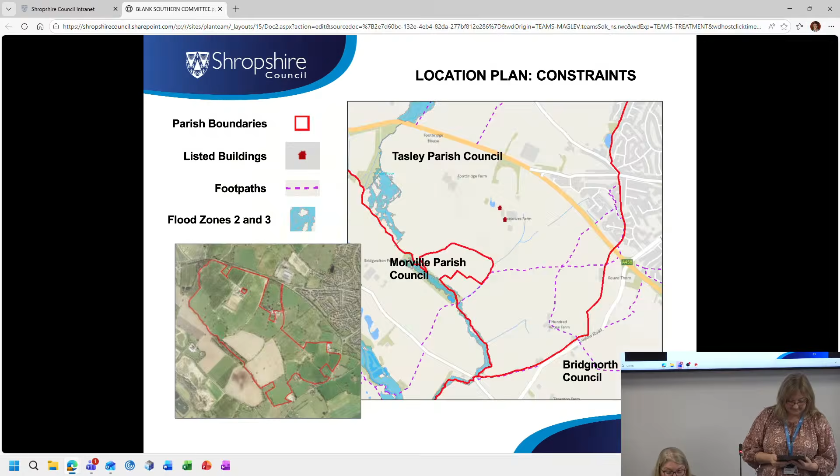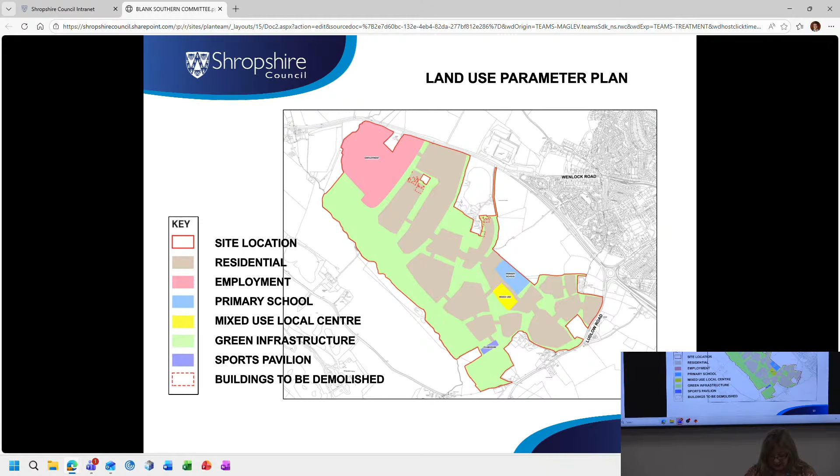The land use parameters plan is your next paper copy. This sets the zones or areas for different uses. The zones include, as appropriate, roads, incidental open space and associated infrastructure. The sports pavilion includes associated car parking. The mixed-use local centre incorporates commercial, retail and residential, including specialist housing. And the green infrastructure covers public open space, amenity space, equipped play areas, sports pitches, water bodies, drainage utilities and service infrastructure, footpaths and cycleways.

Again, you have a paper copy of this access and movement parameters plan to enable you to read the key. This plan lays the proposed accesses and movement routes over the parameters. Essentially, the main spine road is shown in yellow and is the intended bus route. Blue star shows the proposed bus link point

between the employment land and the spine road. This is intended as one way, with the bus entering the site through the Z01 access and leaving through the Z03 access. So the blue star is up here. The proposed bus route is through the employment site, onto the spine road and throughout onto the B road.

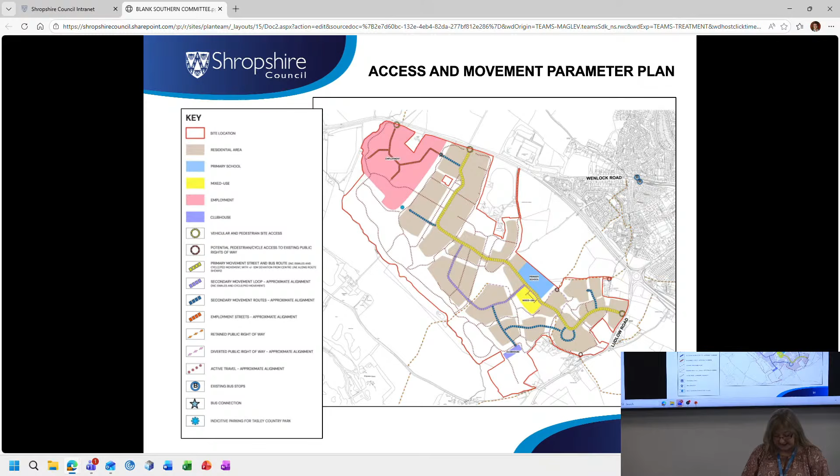Pavement links are proposed between the Z01 access, Z02 roundabout and approved Tasley Gateway roundabout, and from the Z03 access up to the Ludlow Road roundabout. The dotted lines indicate the intended active travel routes. Your key for this one is on your next paper copy.

This parameter plan shows the extent of public open space proposed together with the retained trees and hedgerows marked. These are the elements on which the layout on the illustrative master plan has been formed. You can also see from the satellite image on the right how the pattern and form of the land has been largely retained.

Additionally, when viewed together with the constraints plan on the left, the country park is proposed to be located where the land clips into flood zones 2 and 3, creating opportunities for providing and enhancing blue infrastructure. So you can see the curve of the country park and the curve of the flood zone.

There are 6 locations identified for equipped play areas, and these are shown as the purple and yellow stars. Yellow star, purple star, 6 altogether.

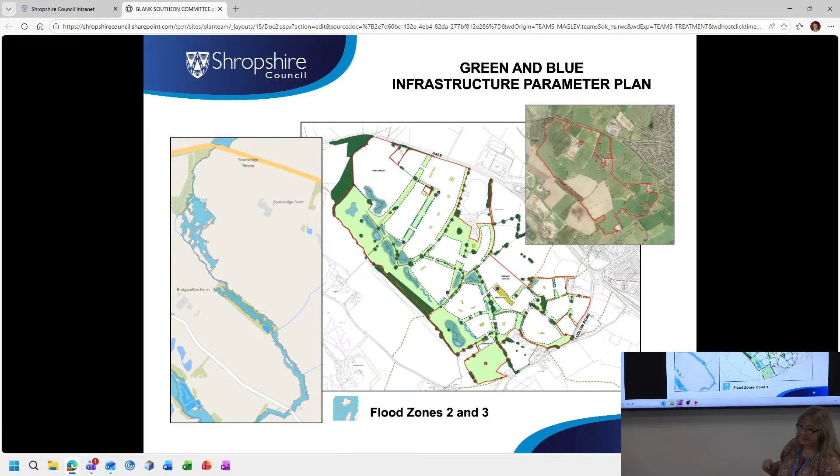The complexities of this play strategy drawing are better viewed on your paper copy. The plan shows the indicative locations for equipped play areas. These are positioned at the recommended offset distances and walking distances from dwellings. The strategy also indicates additional opportunities for indicative play on the way in yellow and outdoor gym features in light blue. So your strip of outdoor gym features is there.

And the indicative play on the way are the yellow points here, the smaller yellow points. Fitness routes are annotated by the dark blue lines.

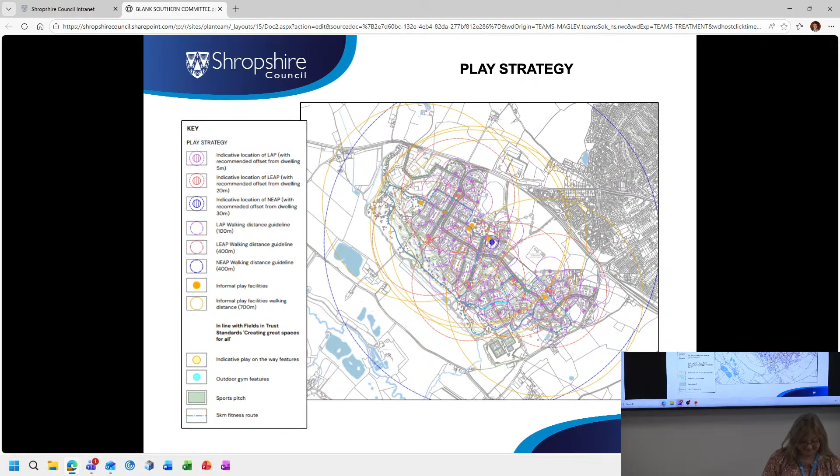The green and blue infrastructure features and play areas are brought together in this illustrative plan to provide an overview of the landscape strategy. I've not added the key on the image as it's extensive. However, the numbered elements provide an indication of some of the features that are proposed to be included. For example, the community growing area at number 7 and the cycle skills track at number 2.

I'll now go on to the 3 access points, which, as a reminder, are there, there, and here.

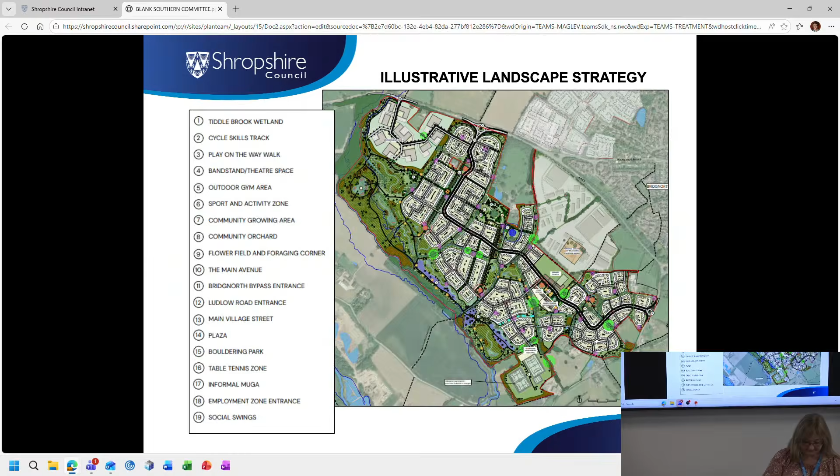This slide shows the proposed employment access, which is a priority T junction with a ghost island right turn lane on the A458. It will be used exclusively for the employment zone and is designed to accommodate HGVs.

The dedicated footway and cycleway on the southern side of the carriageway would extend up to the A458 residential access to the west. The inset in the top right shows the location of this junction in red, together with the locations of the other proposed junctions, and the position of the roundabout previously approved as part of the Tasley Gateway development, drawn in pink.

Gateway roundabout. This plan shows the footpath and cycleway here, which extends back down to the residential access.

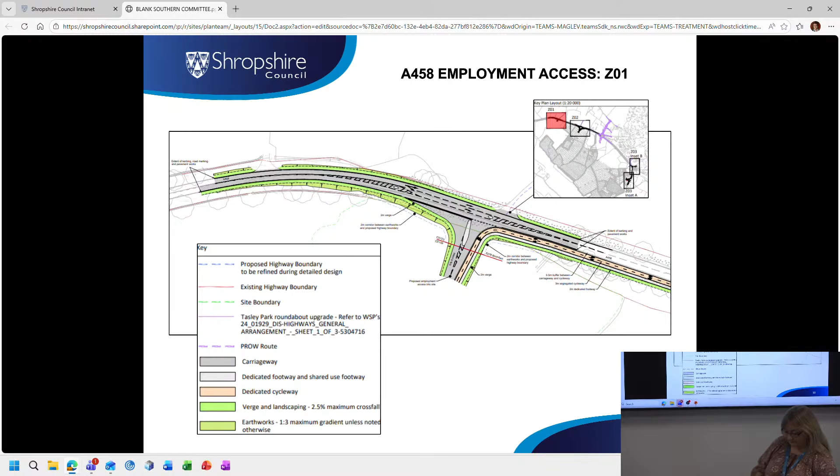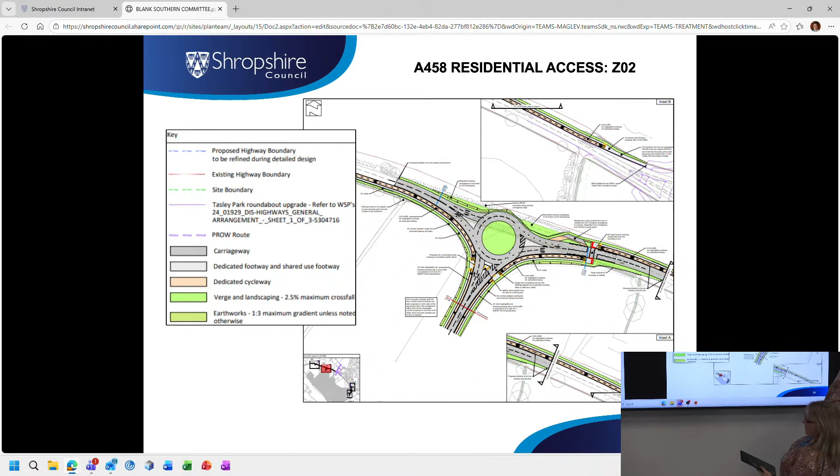The image on the right shows the 3-arm priority controlled compact roundabout, which is proposed as a residential access off the B4364. There is a pedestrian crossing with tactile paving on the western arm of the roundabout.

That's into the development. And a footway and cycleway extending up to the Ludlow Road roundabout, where it would link with the existing public right-of-way, here. This is indicated in the image on the left.

Here there is a second toucan crossing proposed together with the formalisation of existing crossings to facilitate walking and cycling into Bridgnorth Town Centre. The photograph of Ludlow Road is included to indicate the existing refuge island there would be widened.

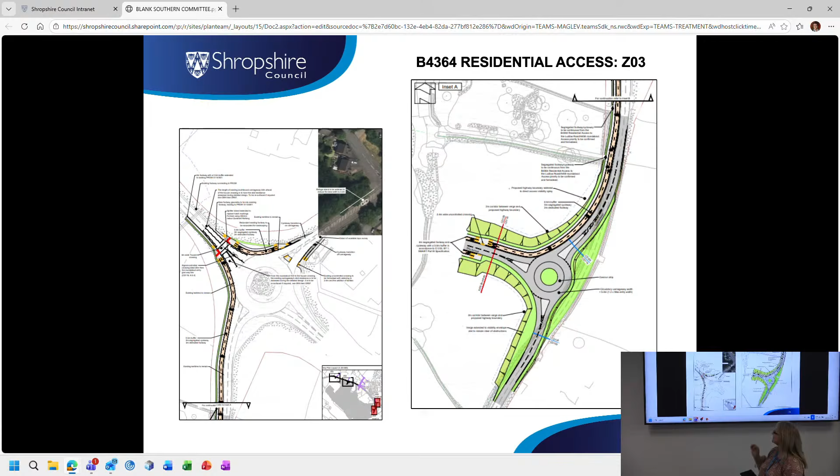The accesses are proposed in conjunction with a reduction in speed limit to 40 miles an hour along both the A458 and B4364, shown in green on this plan.

This will be complemented by associated signing and road markings, with a detailed signage strategy to be agreed with the local highways authority as part of the final design works.

A 30 miles per hour speed limit would apply within the proposed development and, as existing, into Bridgnorth along Wenlock and Ludlow roads. The position of the Tasley Park roundabout is again shown in pink.

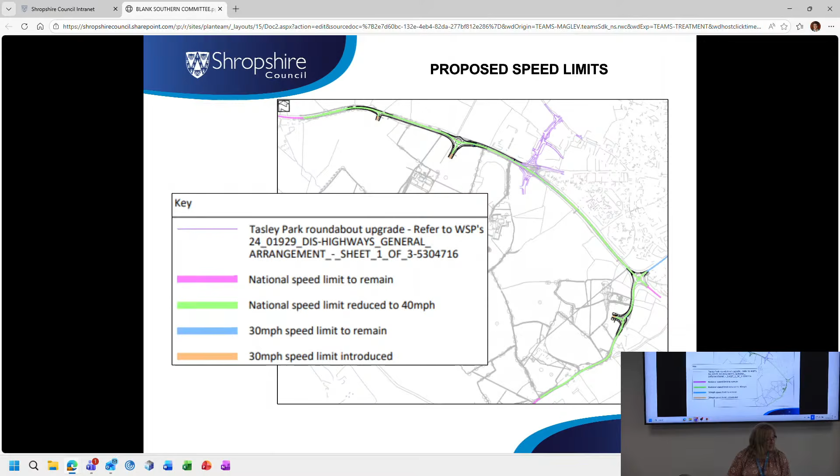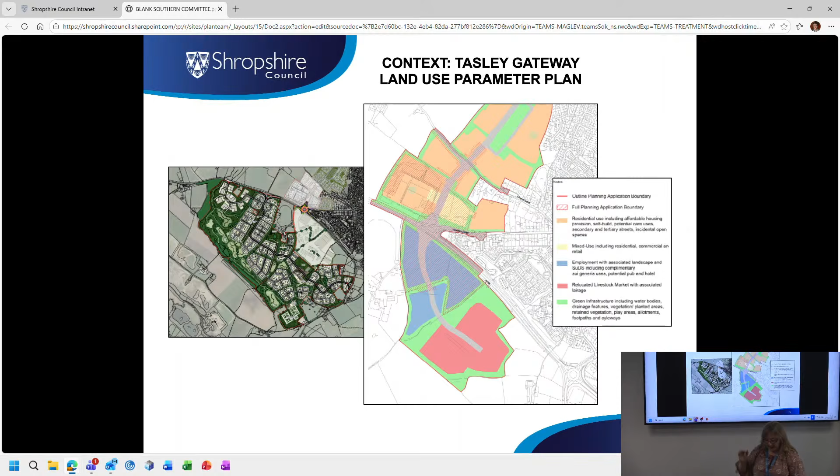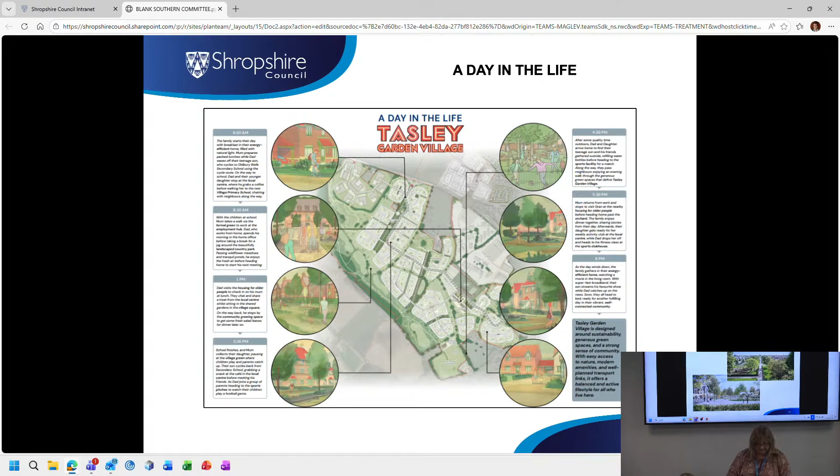The last few slides are visuals for the operational phase of Tasley Garden Village and summarise the benefits which will be gained through it.

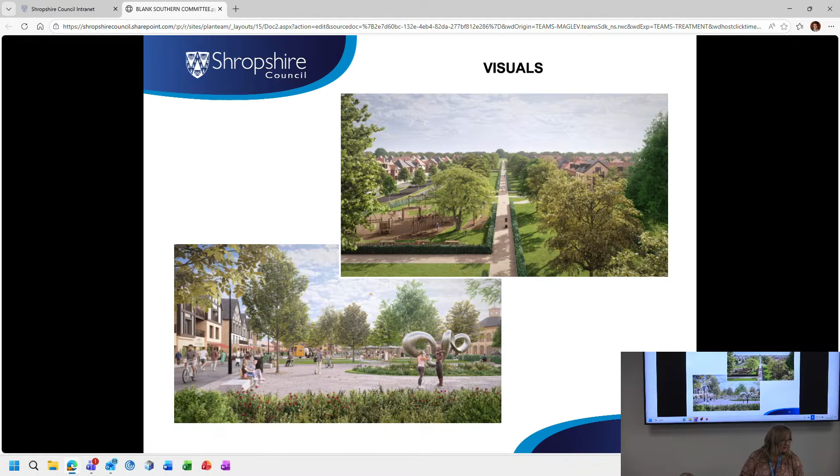I've returned to the illustrative master plan for the final view, which is back to your top paper copy. As set out in the committee report, the application proposes a scheme which has been developed in a strategic manner that reflects national planning objectives to provide multiple benefits on a sustainable site. The balancing exercise for this site is weighed heavily in favour of approval, and there are no other material considerations which, when weighed in the planning balance, outweigh the presumption in favour of development.

Members are requested to support officer's recommendation for approval of outline planning permission with delegated powers to officers to finalise the conditions based on those set out in Appendix 1 of the committee report, and securing of developer contributions as set out in paragraph 6.4.2 of the committee report, including the completion of a section 106 agreement. Thank you.

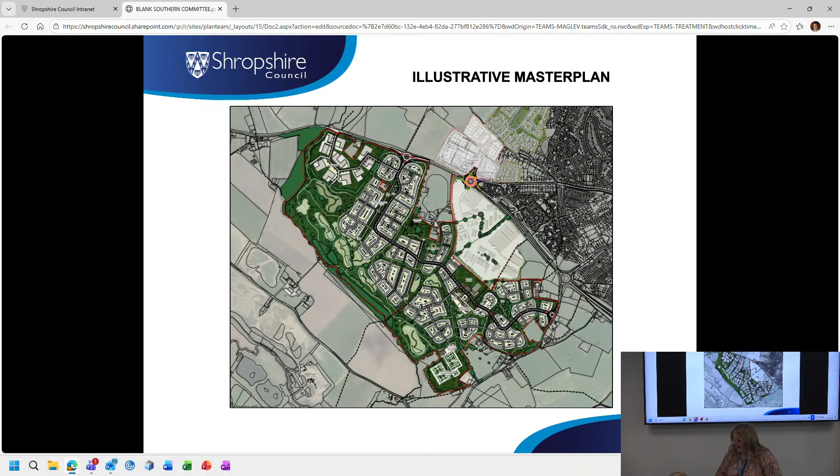Are there any immediate questions for Lynn? Yes, Councillor Lumley.

In some of the late submissions, we've heard from the developer across the road about where the market is and its closeness to the school and other dwellings, and that if both were granted outline planning consent, this might influence where that market could go, and in fact negate it going there at all. They've suggested that then makes the whole thing unsustainable. I just wondered what the planners thought about that. Thank you.

Through your chair, I'll see if I can help there, Councillor Lumley. So if you turn to your landscape strategy plan, what that helpfully indicates is the potential location of the livestock building and the air quality buffers which came in with the outline application for the Tasley Gateway development. So what is unknown at this point is the precise location that that's going to go. As Lynn showed, the outline application as granted is subject to a parameters plan, which is shown in the slides, which gives an indication and an idea about where that building will go.

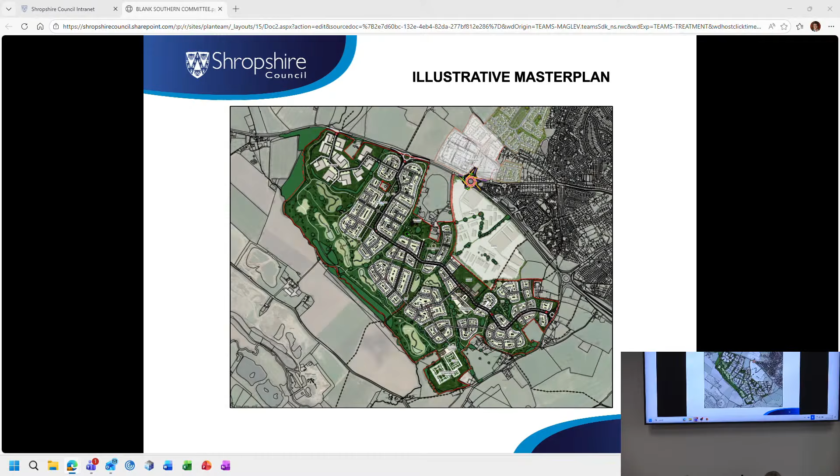The proposed development will present a visual change and a change in landscape character within the setting of Grade 2 listed the Leasos, and the proposed TGV houses would border the Leasos gardens, well within its setting. The proposed TGV community orchard and neighbourhood park fall well short of mitigating the effect of the proposed development on the Leasos. The Barnwell Manor Wind Energy Appeal Judgment makes clear that the desirability of preserving the settings of listed buildings must be given considerable importance and weight when the decision maker carries out the balancing exercise.

Building 1,500 houses and an employment site close to and within the Grade 2 listed Leasos setting can therefore not be justified.

The proposed football pitch is placed directly beside long-established horse paddocks, posing serious welfare risks from noise, lighting and increased activity. Should SC allow this development to go ahead, we advise the pitch and associated facilities be located close to the proposed primary school and near the entrance of the development to allow for dual use and ease of access for the increased traffic it would inevitably bring.

Tasley Parish Council suggests Shropshire Council consider the Bradford Estates proposal sited close to Junction 3 of the M54, which offers 3,000 houses alongside jobs including a tech park, training opportunities and better transport links, and avoids concentrating two major developments in one small parish. For these reasons, Tasley Parish Council respectfully requests that Shropshire Council refuse this application as it stands.